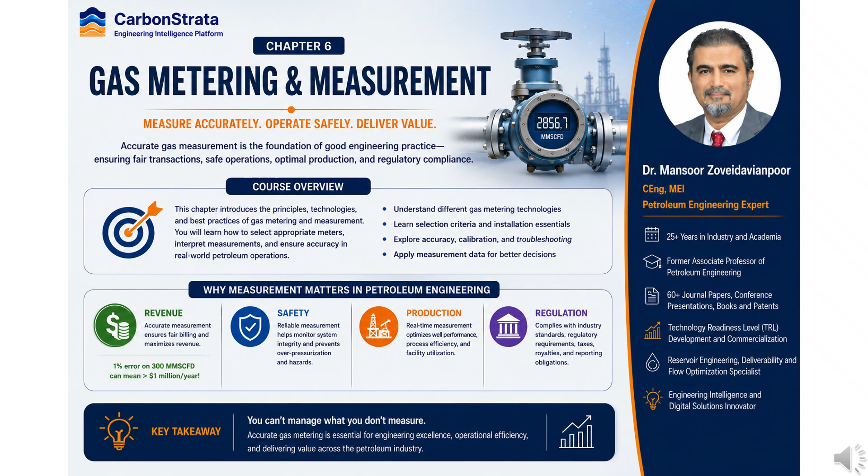Why is gas measurement so critical in the petroleum industry? Because every business decision begins with an accurate measurement. Gas metering determines how much product is bought and sold, ensuring fair custody transfer between producers and customers. It also forms the basis for royalty payments, taxation, and production allocation among partners and facilities.

Beyond economics, accurate measurement supports safe and efficient pipeline operations by helping engineers monitor flow, optimize performance, and maintain system integrity. The impact of measurement accuracy is enormous. A 1% error in a gas stream of 300 million standard cubic feet per day can result in more than $1 million per year in lost or misallocated revenue.

The message is simple: every unit counts. Accurate measurement protects revenue, improves safety, ensures compliance, and delivers value across the entire petroleum industry.

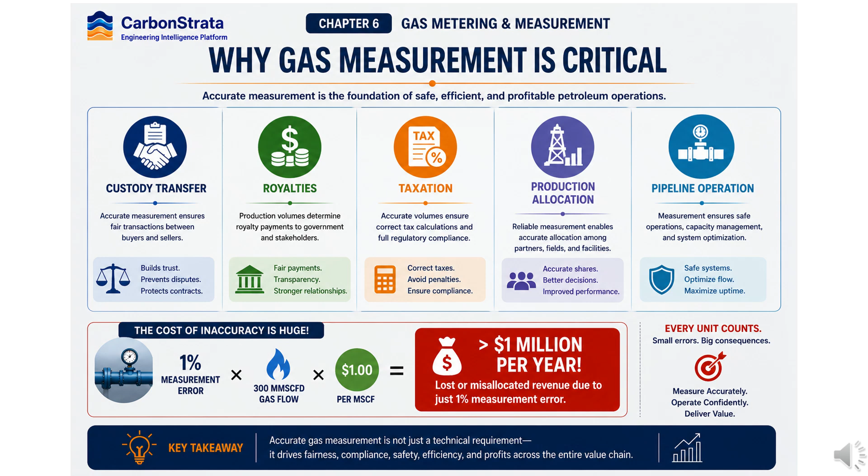There are 4 challenges in gas measurement. First, pressure affects volume. As pressure increases, gas is compressed and occupies less space. As pressure decreases, gas expands. Second, temperature affects volume. Warmer gas expands, while cooler gas contracts, changing the measured volume.

Third, natural gas does not behave exactly like an ideal gas. Compressibility effects become significant at high pressures and must be accounted for using correction factors to ensure accurate measurements. Finally, all gas volumes must be converted to standard conditions so that measurements can be compared consistently across facilities, pipelines, and commercial transactions.

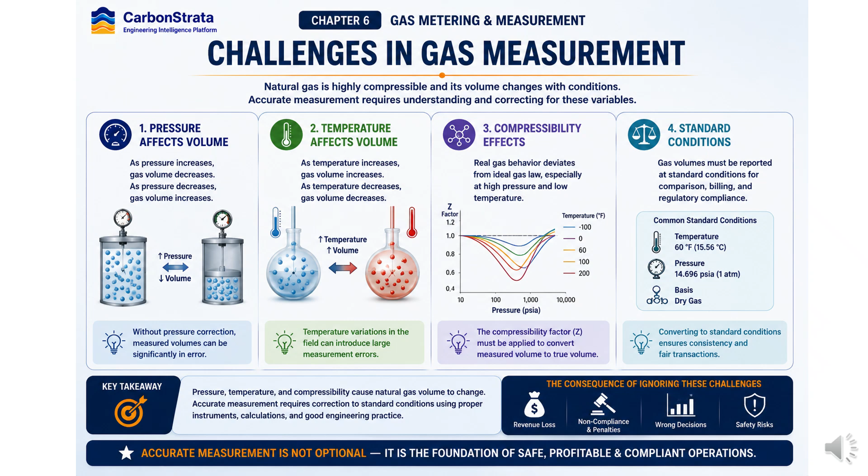The key takeaway is simple: pressure, temperature, and compressibility all influence gas volume. Accurate gas measurement requires correcting for these effects to ensure fair, reliable, and compliant operations.

Gas flow meters can be classified into 4 main categories based on how they measure flow. Differential pressure meters determine flow from the pressure drop created by a restriction in the pipeline. These are among the most widely used meters in the industry.

Velocity meters measure the speed of the gas and convert it into a flow rate. Common examples include turbine and vortex meters. Positive displacement meters measure flow by trapping and counting fixed volumes of gas, making them highly accurate for many commercial applications. Mass flow meters measure the actual mass of gas flowing through the system, independent of pressure and temperature changes.

Each meter type has unique strengths, limitations, and applications. Selecting the right technology depends on operating conditions, required accuracy, installation requirements, and economic considerations. The key takeaway is simple: understanding meter classification is the first step toward choosing the most effective gas measurement solution.

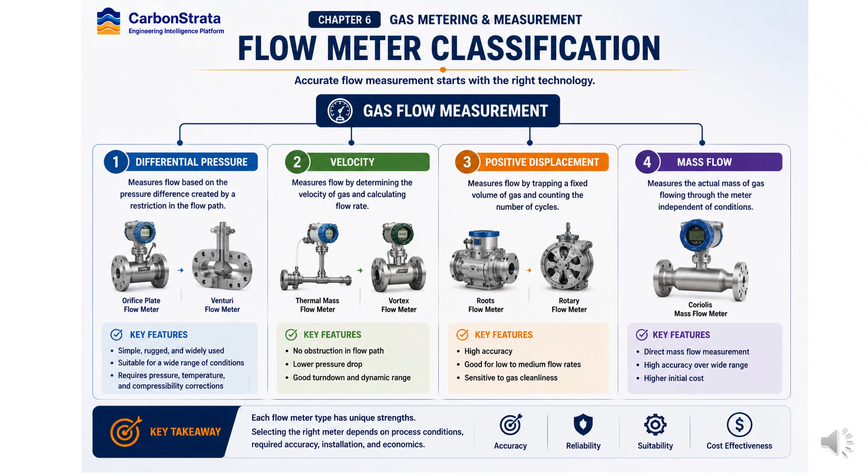Selecting the right gas meter is not a one-size-fits-all decision. Engineers must evaluate several factors before choosing the most suitable technology. The process begins by confirming that the application involves gas measurement. Next, we determine whether the measurement is for custody transfer, where accuracy and financial accountability are critical.

If high accuracy is required, the next consideration is gas quality. Clean, dry gas may be suitable for advanced meters such as turbine, ultrasonic, or mass flow meters. Dirty or wet gas may require more robust technologies that can tolerate challenging operating conditions.

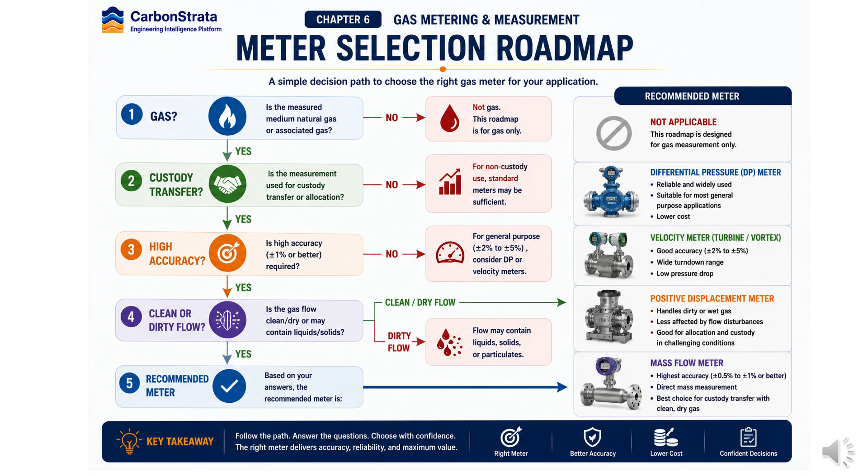By following a structured decision-making process, engineers can match the meter technology to the application, ensuring reliable performance, accurate measurement, and cost-effective operation. The key takeaway is simple: ask the right questions, follow the roadmap, and select the meter that best fits the process conditions and measurement objectives.

The orifice meter is one of the most widely used gas flow meters in the petroleum industry. It operates on the differential pressure principle. As gas flows through an orifice plate, the flow area is restricted, causing a pressure drop. By measuring the pressure difference across the plate, the gas flow rate can be calculated.

A typical orifice metering system consists of an orifice plate, pressure taps, impulse lines, a differential pressure transmitter, and a flow computer. Because of its simplicity and proven reliability, orifice metering is commonly used in pipelines, custody transfer stations, production facilities, and compressor stations. Its main advantages include low cost, rugged construction, ease of installation, and widespread industry acceptance.

However, it also has limitations, including permanent pressure loss, lower accuracy than some modern meters, and sensitivity to installation conditions.

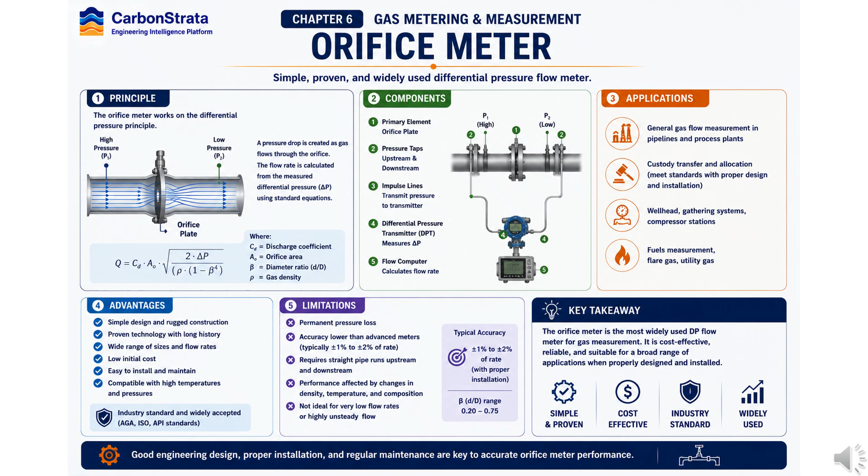The key takeaway is that the orifice meter remains an industry standard because it is simple, reliable, and cost-effective when properly designed, installed, and maintained.

Let's see how an orifice meter is used to calculate gas flow in practice. The first measurement is the differential pressure across the orifice plate. In this example, the pressure drop is measured by a differential pressure transmitter. Next, we record the operating pressure and gas temperature. These values are essential because gas density changes with both pressure and temperature.

Using the differential pressure, temperature, and meter characteristics, the flow computer applies the standard orifice meter equations to calculate the gas flow rate. The calculated flow is then corrected to standard conditions, allowing the measurement to be compared consistently for reporting, allocation, and custody transfer purposes.

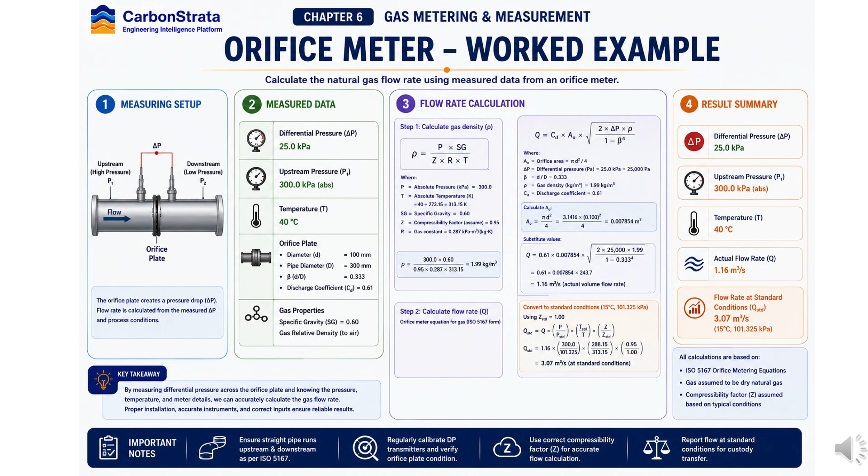This example highlights an important principle. Accurate gas flow measurement depends not only on differential pressure, but also on reliable pressure and temperature data. These measurements enable engineers to determine flow rates with confidence.

The Venturi meter is another differential pressure flow meter, but it uses a gradually converging and diverging flow path instead of a sharp-edged orifice plate. As gas flows through the narrow throat section, its velocity increases and pressure decreases. The pressure difference between the inlet and the throat is then used to calculate the flow rate.

Compared with an orifice meter, the Venturi meter offers a major advantage: significantly lower permanent pressure loss. This means less energy is wasted as the gas flows through the meter. Venturi meters are also better suited for dirty, wet, or particulate-laden fluids because their smooth internal profile is less prone to erosion, wear, and blockage.

However, these benefits come at a higher cost. Venturi meters are larger, more complex to manufacture, and more expensive to install than orifice meters. The key takeaway is that Venturi meters provide excellent performance with lower pressure loss and better handling of challenging flow conditions, making them a preferred choice when efficiency and reliability justify the higher investment.

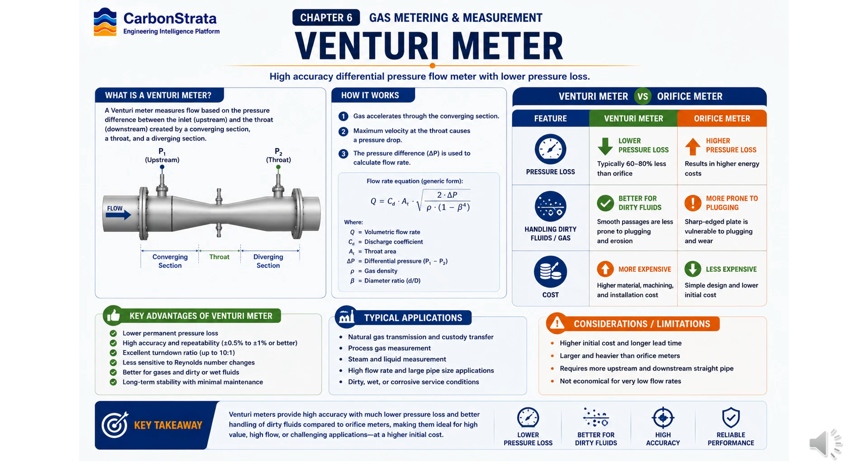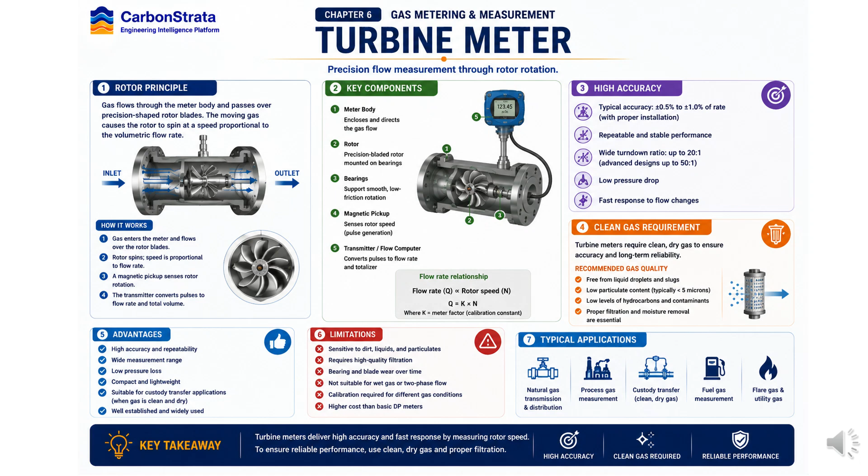For this reason, filtration and gas conditioning are often required upstream of the meter. The key takeaway is that turbine meters offer highly accurate and reliable flow measurement, but their performance depends on maintaining a clean gas stream and proper operating conditions.

The positive displacement meter measures gas flow by directly capturing and counting fixed volumes of gas as they pass through the meter. Unlike differential pressure or velocity based meters, a positive displacement meter does not infer flow from pressure changes or fluid velocity. Instead, it physically traps a known volume of gas and transfers it from the inlet to the outlet. By counting the number of cycles, the total gas volume can be measured directly.

This direct measurement approach provides excellent accuracy and repeatability across a wide range of operating conditions. Because of its precision, the positive displacement meter is widely used in custody transfer applications where accurate billing and revenue measurement are critical. These meters are commonly found in city gas distribution systems, industrial gas supply networks, and commercial metering stations handling low to medium flow rates.

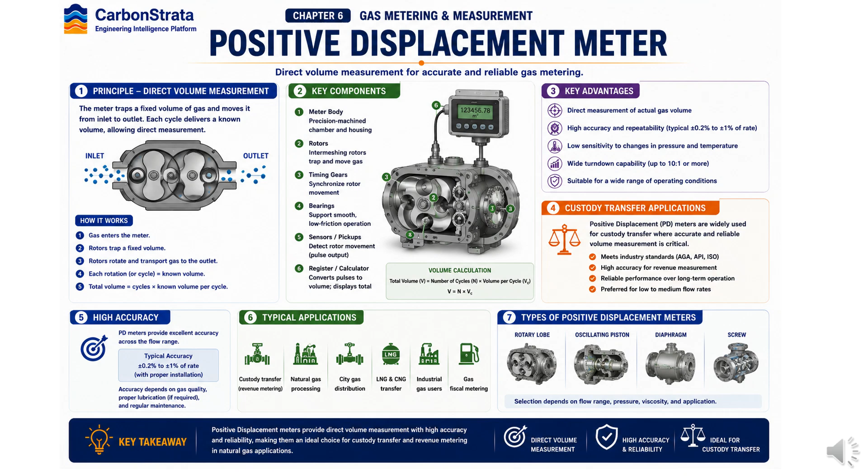The main advantages include high accuracy, reliable long-term performance, and minimal sensitivity to flow profile variations. However, because they contain moving mechanical parts, regular maintenance may be required to ensure continued accuracy. The key takeaway is that positive displacement meters provide direct volume measurement with exceptional accuracy, making them one of the preferred technologies for custody transfer and revenue metering applications.

Thermal meters measure gas flow based on heat transfer. They directly measure mass flow and are widely used where low flow rates and high turndown capability are required. Vortex meters operate by detecting vortices that form downstream of a bluff body placed in the flow stream. The frequency of these vortices is proportional to the flow rate, making vortex meters suitable for both gas and steam applications.

Magnetic meters use electromagnetic induction to measure flow. However, because natural gas is not electrically conductive, magnetic meters are generally used for liquids rather than gas measurement.

Target meters measure the force exerted by flowing fluid on a target placed in the pipeline. They are rugged and can handle challenging process conditions, including dirty or wet flows.

Pitot tube meters determine flow velocity by measuring the difference between stagnation pressure and static pressure. They are simple, economical, and commonly used for large pipelines and flow surveys.

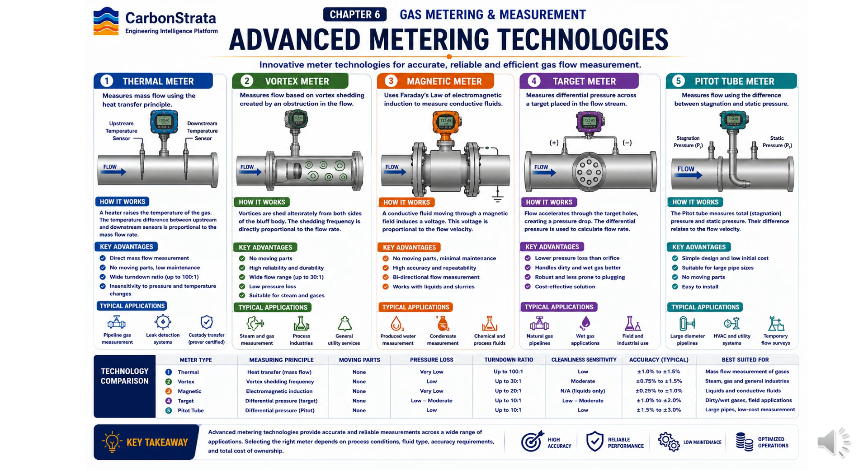The key takeaway is that each advanced metering technology offers unique advantages. Selecting the right meter depends on factors such as fluid properties, accuracy requirements, operating conditions, maintenance needs, and overall project economics. The orifice meter offers high accuracy at the lowest cost, making it one of the most widely used meters in the industry. However, it produces relatively high pressure loss and performs only moderately well with dirty or wet gas.

The Venturi meter also delivers high accuracy, but with significantly lower pressure loss. Its smooth flow path makes it excellent for handling dirty fluids and wet gas streams. The trade-off is a higher purchase and installation cost.

Turbine meters provide very high accuracy and excellent repeatability, making them popular for custody transfer applications. However, they require clean, dry gas because dirt and liquids can damage the rotating components.

Positive displacement meters also achieve very high accuracy through direct volume measurement. They are widely used for revenue metering and custody transfer, but their moving mechanical parts make them less suitable for dirty gas streams and can result in higher pressure loss.

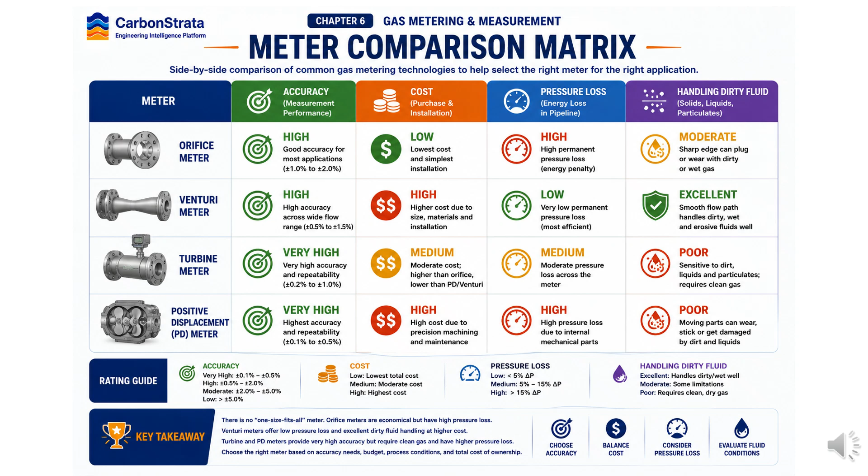The key takeaway is that no single meter is best for every application. Engineers must balance accuracy, cost, pressure loss, and fluid conditions to select the most appropriate metering technology for a given operation.

Gas metering plays a critical role across the entire petroleum value chain. Different applications require different metering objectives, but all depend on accurate and reliable flow measurement.

In well testing, gas meters measure flow rates and total produced volumes to evaluate reservoir performance, productivity, and well deliverability.

For production allocation, metering data is used to fairly distribute production volumes among wells, assets, or joint venture partners, ensuring transparency and accurate revenue allocation.

Within gathering systems, gas meters monitor flow through collection networks, helping operators detect imbalances, identify losses, and optimize transportation efficiency.

At custody transfer points, metering accuracy becomes commercially critical. Measurements determine the quantity of gas being bought and sold, requiring compliance with industry standards and regulatory requirements.

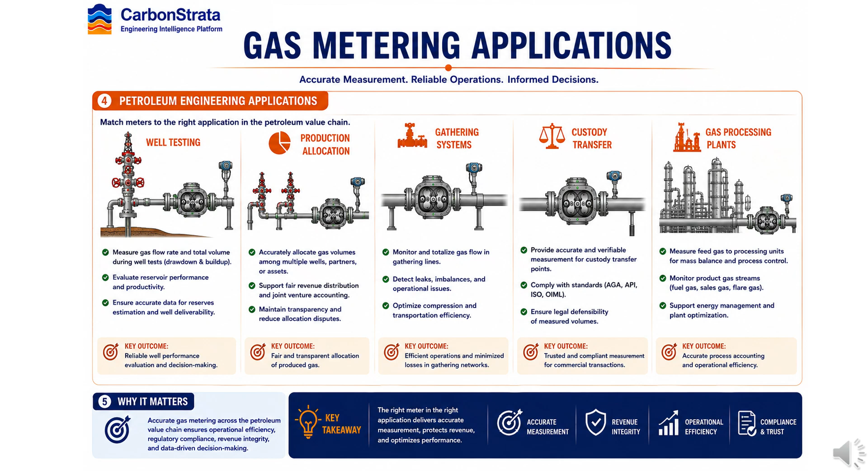In gas processing plants, meters track feed gas, product streams, and fuel gas consumption, supporting process control, accounting, and plant optimization. The key takeaway is simple: selecting the right gas metering application ensures accurate measurement, operational efficiency, regulatory compliance, and revenue integrity throughout petroleum operations.

Let's apply meter selection principles to a practical field case. Our scenario is a gas well producing 10 million standard cubic feet per day, or 10 MMSCFD. Before selecting a meter, engineers must answer three critical questions.

First, is the gas clean? Clean, dry gas with minimal liquids and solids allows the use of high-performance meters that rely on stable flow conditions.

Second, is the measurement for custody transfer? If the measured volume will be used for commercial transactions and revenue calculations, high accuracy and industry compliance become essential requirements.

Third, is sufficient pressure available? Some meter technologies require an adequate pressure differential to achieve their specified accuracy and performance.

In this case, the answers are yes to all three questions. The gas is clean, custody transfer accuracy is required, and adequate pressure is available. Therefore, a turbine meter is an excellent choice. It provides high accuracy, proven reliability, low maintenance requirements, and is widely accepted for custody transfer gas measurement.

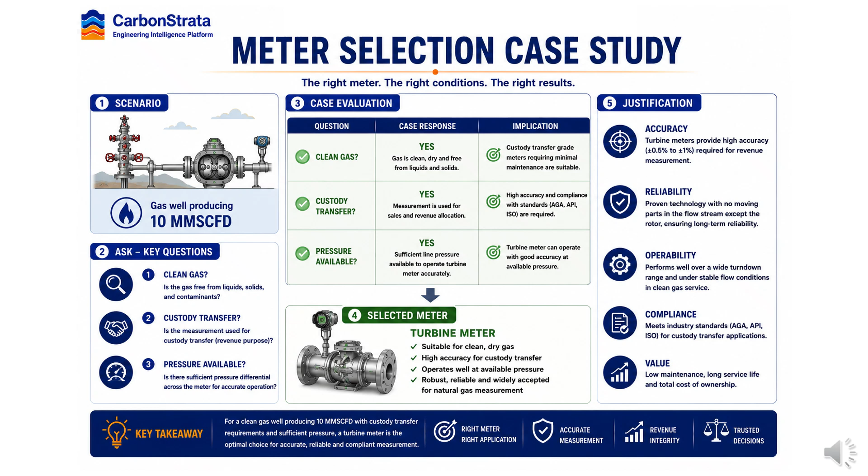The key lesson is that meter selection should always be based on process conditions, measurement objectives, and operating constraints, not simply on flow rate alone.

This chapter presented gas metering and measurement. We began by understanding why accurate measurement is essential for operations, revenue, and regulatory compliance. We then examined the key challenges affecting measurement accuracy, including pressure, temperature, gas composition, and flow conditions. Next, we reviewed the major gas meter types and their operating principles.

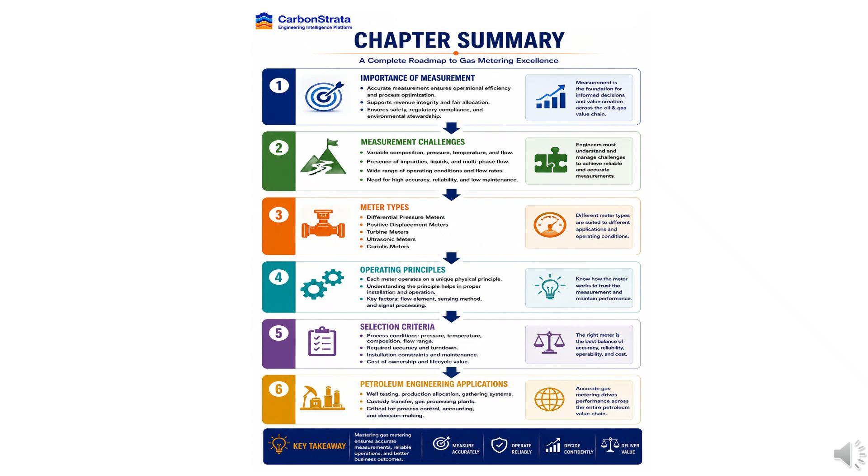We also learned how to select the right meter based on process conditions, accuracy requirements, and operational constraints. Finally, we explored petroleum engineering applications. The key takeaway is simple: the right meter in the right application delivers accurate measurements, reliable operations, and better engineering decisions.